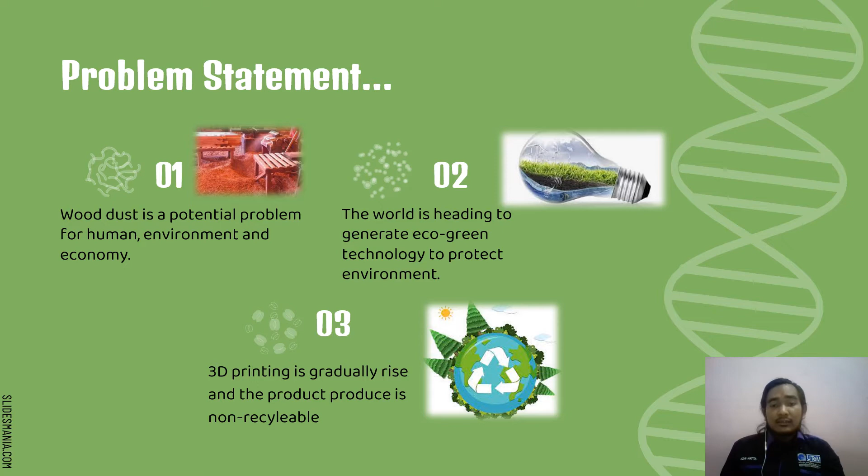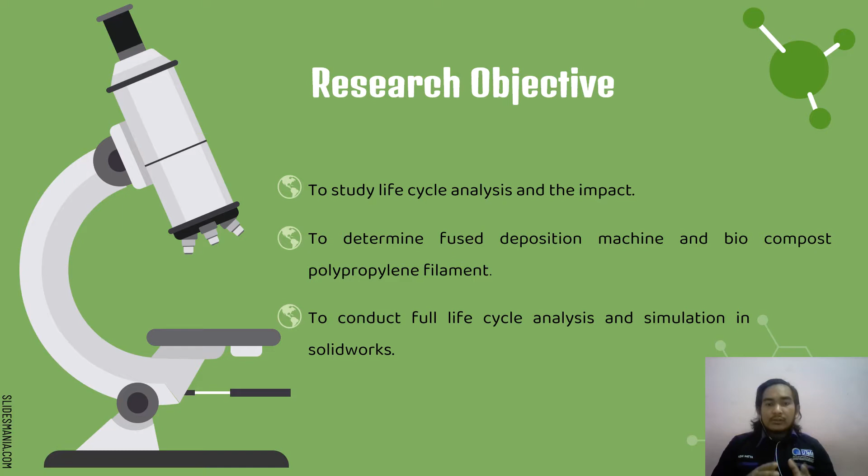The research objective of this project is, first, to study life cycle analysis and its impact, meaning I need to know the process of life cycle analysis and the advantages, as well as the impact from cradle to cradle. Second, to determine the fused deposition machine and biocomposite polypropylene filament, meaning I need to know the ability of the polypropylene to be reused and recycled. Lastly, to conduct full life cycle analysis and simulation in SOLIDWORKS.

The scope of research for this project is, first, to determine the suitability of the life cycle analysis module in SOLIDWORKS software to perform specific LCA scenarios. Second, to perform and simulate the injection process of filled polypropylene in SOLIDWORKS software. Lastly, to study a complete LCA from cradle to cradle analysis to determine its impact on the environment. This study will go through the life cycle analysis method to evaluate the impact of the new wood dust reinforced with recycled polypropylene composite filament through its life cycle, covering extraction of raw material, recycling, manufacturing and final disposal.

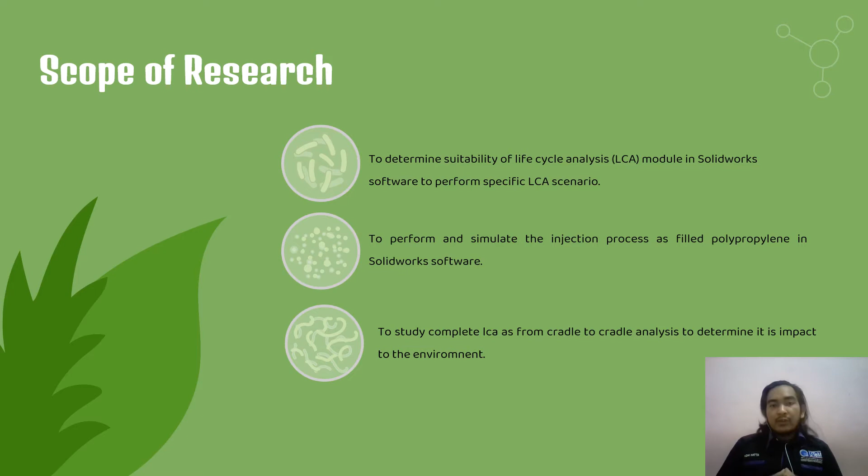In Chapter 2, literature review, I will start with life cycle analysis. From the Journal of Life Cycle Assessment, Past, Present and Future by Guinée 2011, LCA means evaluating the environmental effect of the production and use of a good, such as waste disposal or the provision of a facility.

Another source is the life cycle assessment of wood pellet production in Thailand by Saosee 2020. LCA has widespread application in product development, product improvement, strategic planning, public policy formulating, marketing and communication. Life cycle assessment is an ideal approach for analyzing the environmental effect of a product.

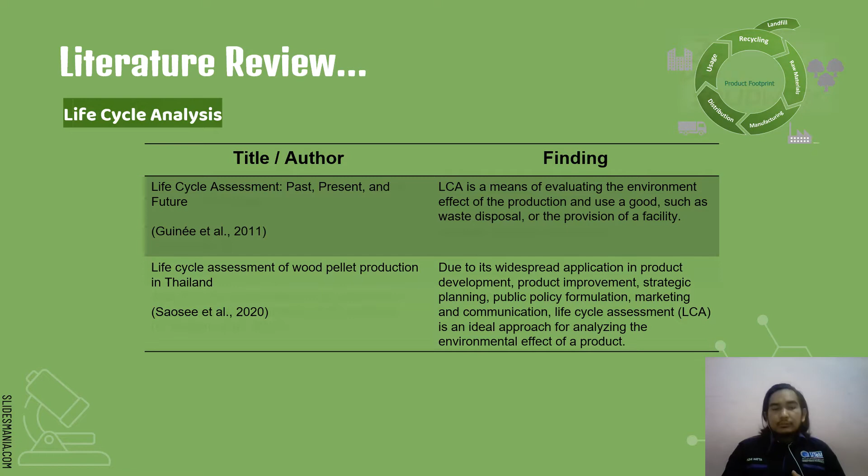For SOLIDWORKS, the Journal of Product Eco-Sustainability Analysis using CAD SOLIDWORKS software by Popa 2017 states there is a core philosophy of economic, social and environmental responsibility behind the sustainable design concept that should be followed by each organization. Second, from Analyzing the Sustainability of an Automotive Component using SOLIDWORKS CAD Software 2017, there are 4 concepts: sustainability, acidification of air, carbon footprint, and total energy consumption and water eutrophication.

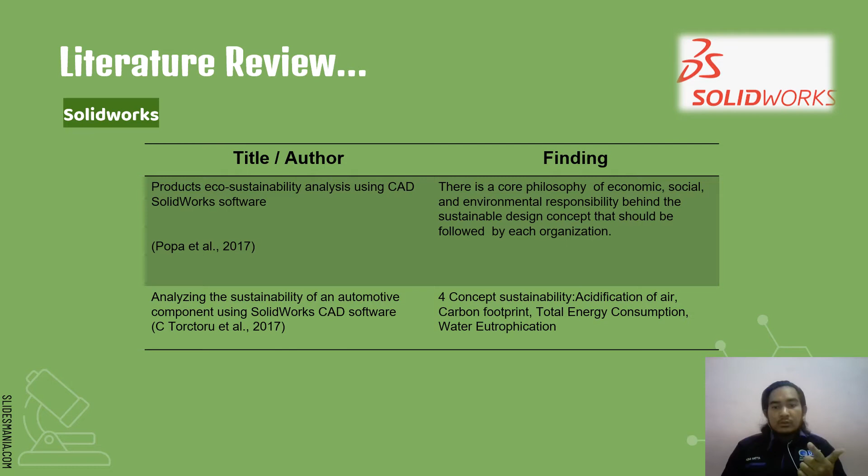Next is filament. From Arvind 2016, 3D printing is a type of additive manufacturing that involves building a product layer by layer using plastic filament as the raw material.

From Yubo Tao 2017, the disadvantages of 3D structures built with FDM using pure plastic material, such as high cost, low strength, and easy distortion, restrict the application of FDM in cost-effective, functional load-bearing applications as well as large-scale production. This journal explains the disadvantages of the filament material, which I will use as my problem statement to improve the material.

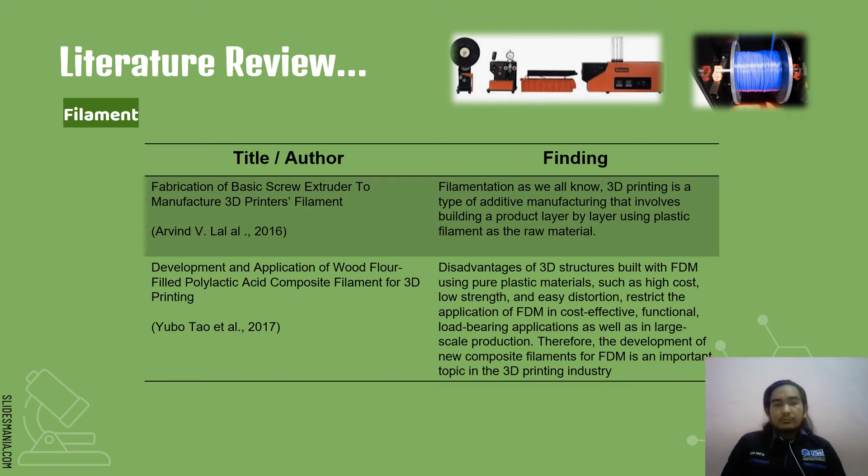The next is wood dust reinforced polypropylene. Based on Fernanda 2016, sawdust-filled polypropylene composite may present performance advantages compared to the pure matrix. Sawdust-filled polypropylene composite is a low cost material and may contribute to solving environmental problems.

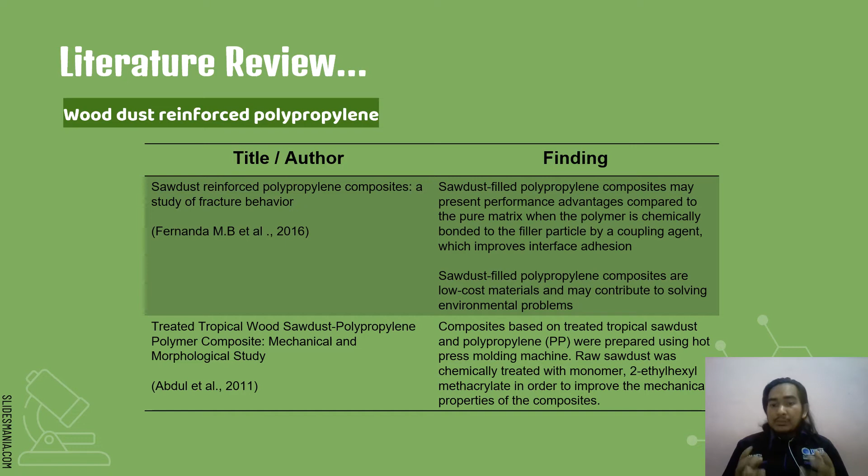Next, by Abdul 2011, composite based on treated tropical sawdust and polypropylene PP were prepared using hot press molding machine.

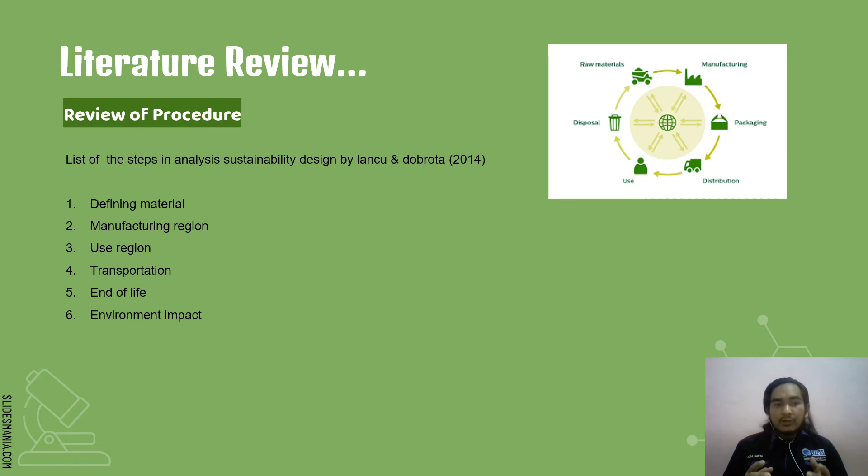The last one is review of procedure. By Lancu and Dobrota 2014, they have listed the steps in analyzing sustainability: first, defining material; second, manufacturing region; third, use region; fourth, transportation; fifth, end of life; and the last one, environment impact.

This is the methodology for chapter 3. It will be shown by the flowchart for the whole process of LCA. It starts by designing the sustainability part, then inserting the material, which is polypropylene reinforced with wood dust. Select the manufacturing process and fill up.

Select the use process region and fill up. Select the transportation and fill up the distance. Fill up the end of life for the product section. Run the simulation and generate the report.

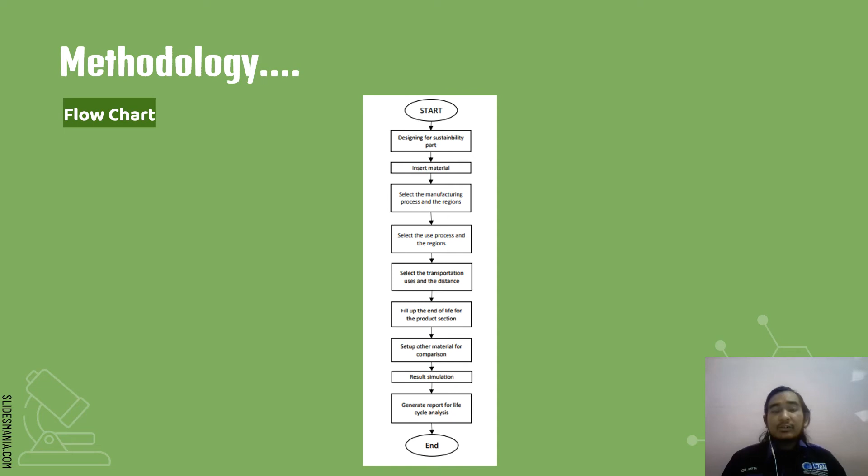This is a detail of the process of LCA. It starts by designing a part, which has width 50 mm, height 50 mm, and length 200 mm. For the material, polypropylene reinforced with wood dust is a composite material. It must be customized in SOLIDWORKS. We need to know the mechanical and material properties first.

For the manufacturing region, we need to know where the part is made and how much electricity and gases are used. For the use region, it's about where the part is sent off later, and we need to know the distance from the manufacturing region to the use region. And the last one is end of life.

End of life consists of 3 things, which is recycle, incinerate, and landfill.

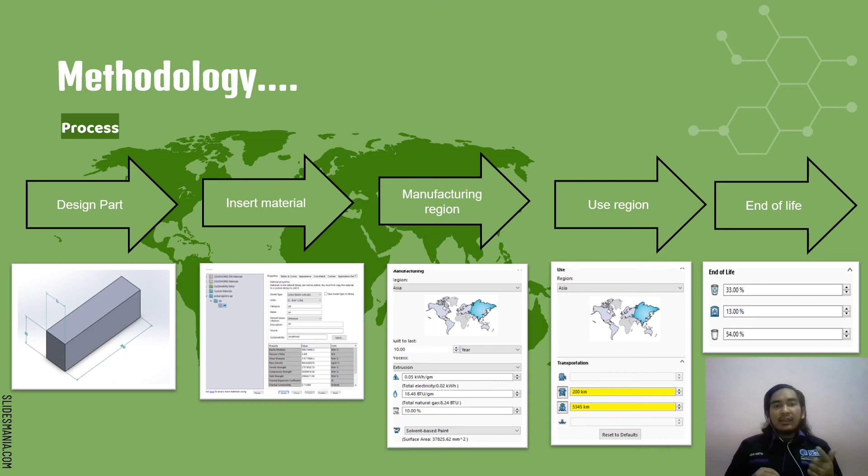This is the result and discussion of chapter 4. Before this, I have run the simulation of polypropylene material to prove the concept of the methodology. So the criteria, mechanical and material properties, I have put in the manufacturing region, transportation region, use region, and end of life.

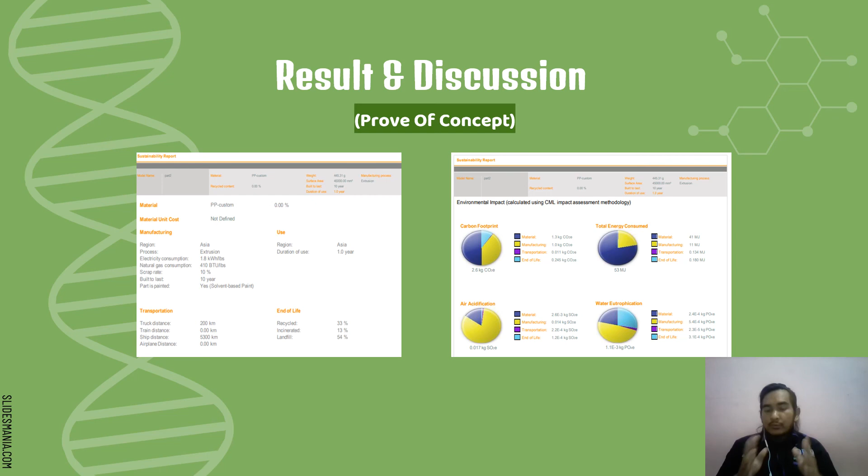This is the result: polypropylene releases 2.6 kg carbon dioxide to the atmosphere and uses 53 megajoules of total energy consumed, 0.017 kg of sulfur dioxide, and 1.1 times 10 to the negative 3 kg phosphate in effluent.

This is the discussion of the result before. The discussion is about the effect and impact toward the environment. First, carbon footprint. Carbon footprint is releasing carbon dioxide to the atmosphere. The increased percentage of carbon dioxide will cause greenhouse effect.

It will not allow the hot rays of the sun to escape from the atmosphere after reflection, once they enter the Earth's atmosphere, thereby increasing the temperature of Earth. Ice on mountains will melt and water levels will rise.

Second is about total energy consumed. A natural consequence of overusing energy is increased cost for manufacturing. It may also risk lowering the expected lifespan of appliances and other electronics.

Air acidification: acid rain also removes minerals and nutrients from the soil that trees need to grow. At high elevation, acidic fog and clouds might strip nutrients from trees and foliage, leaving them with brown or dead leaves and needles.

And the last one is eutrophication. It's an enrichment of the water by nutrient salts that causes structural changes to the ecosystem, such as increased production of algae and aquatic plants, depletion of fish species, general deterioration of water quality, and other effects that reduce and preclude use.